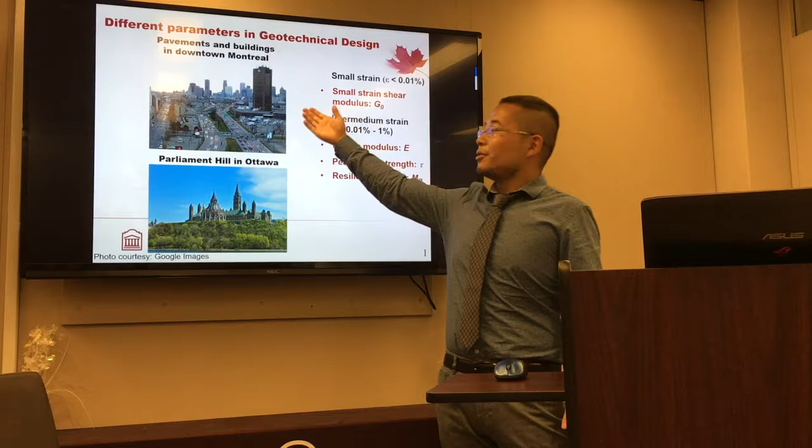For more regular geotechnical infrastructure, for example buildings, pavements in Montreal, or slope analysis here on Parliament Hill in Ottawa, we need the stiffness and shear strength parameters within the intermediate strain, which involve the elastic modulus, the peak shear strengths for the building and slope, as well as the resilient modulus needed in pavement design.

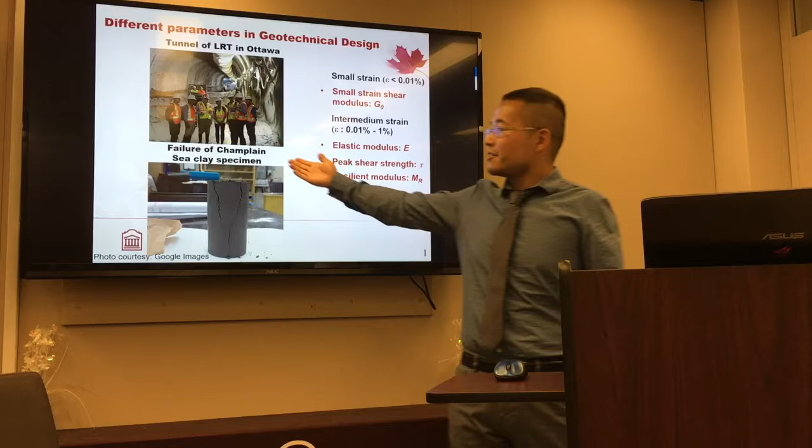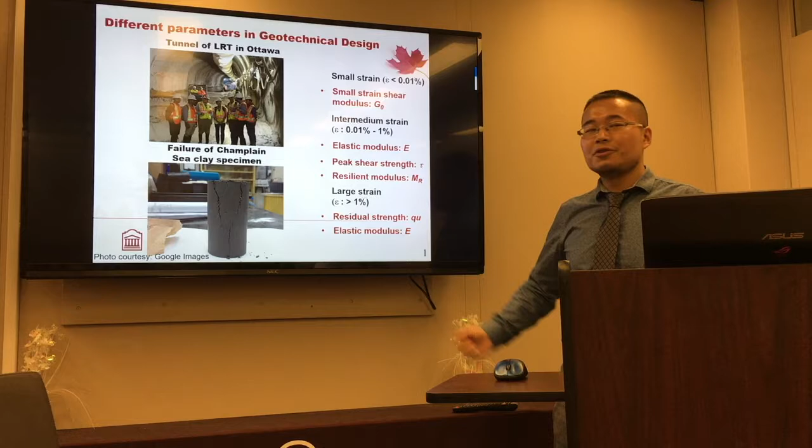In some cases where large strain is encountered, for example the tunneling project of the LRT here in Ottawa, or some laboratory tests where we have a Champlain Sea clay specimen being sheared to failure, we need the residual shear strengths or elastic modulus at very large strain levels.

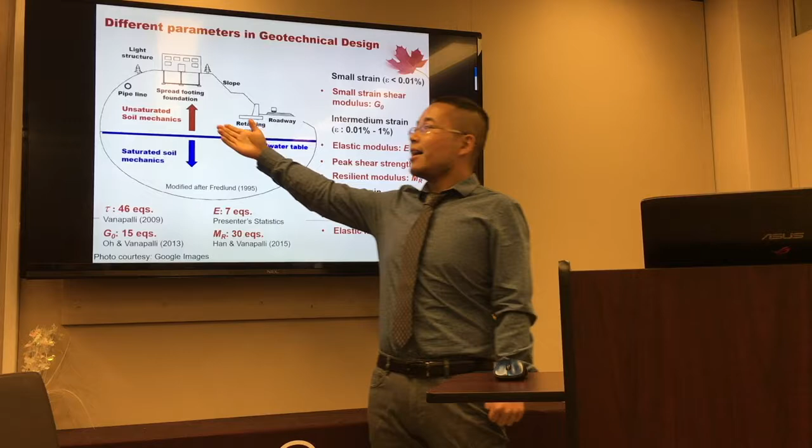On the other hand, our geotechnical infrastructure usually stays above the groundwater table, where soil stays in an unsaturated condition. So we should apply unsaturated soil mechanics instead of traditional saturated soil mechanics.

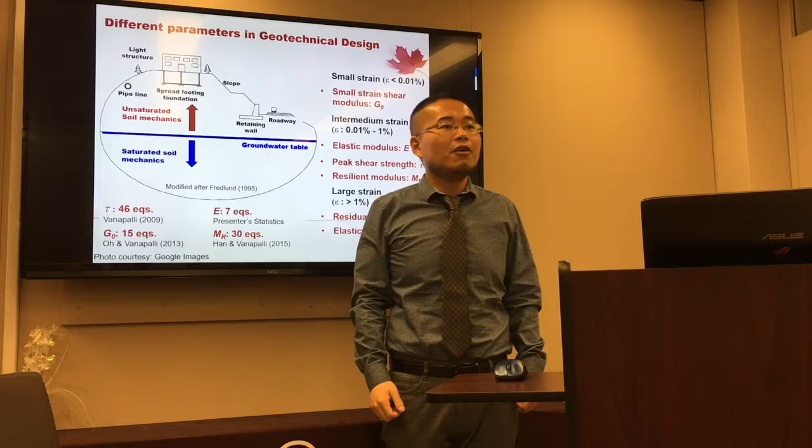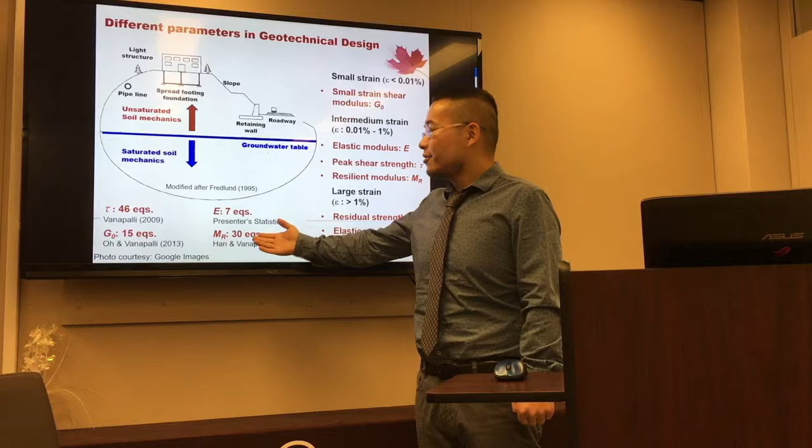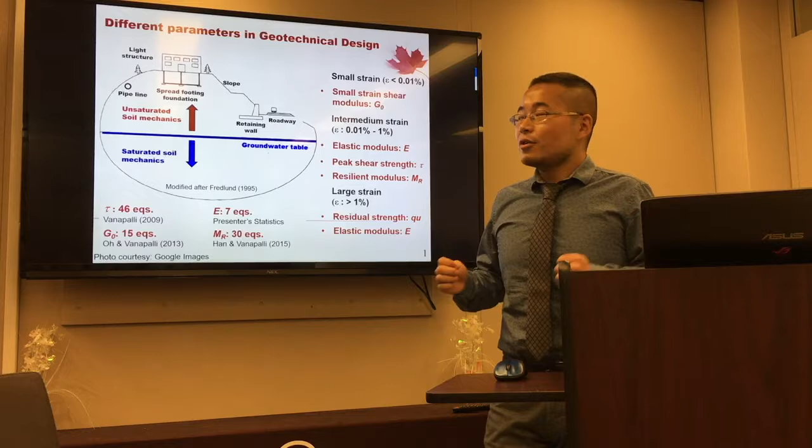Predicting the shear strengths and stiffness properties for unsaturated soils has never been an easy job, and there are many different ways. For example, in the literature currently there are at least 46 different equations available for shear strengths, 7 for elastic modulus, 15 at least for small strain shear modulus, and as per my statistics, 30 equations for the resilient modulus. So here is the question: will there be a uniform model that we can use to predict the variation of unsaturated soil properties with suction or with moisture content?

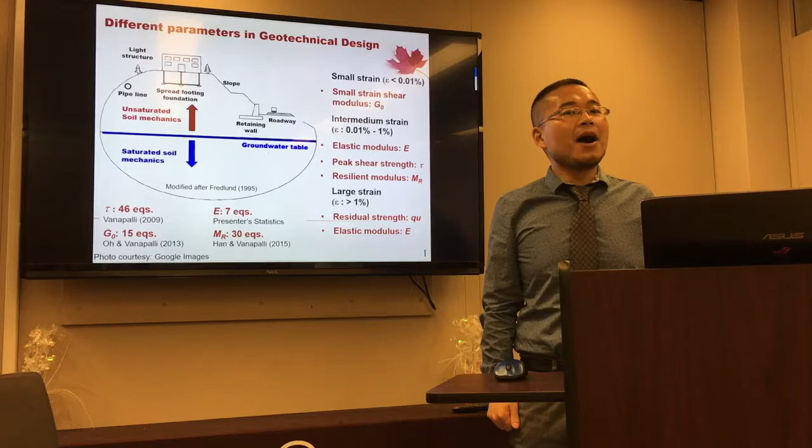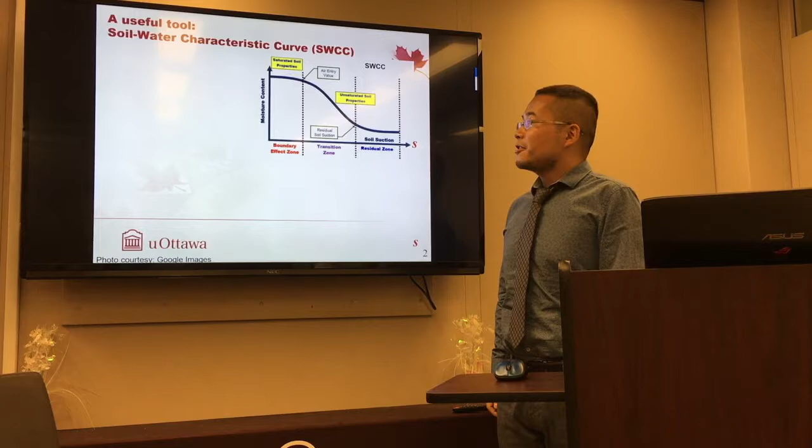And the answer is yes, we do. But before that, we need a very powerful tool, called the Soil Water Characteristic Curve, or SWCC. The SWCC describes the relationship between the moisture content within the soil and the suction.

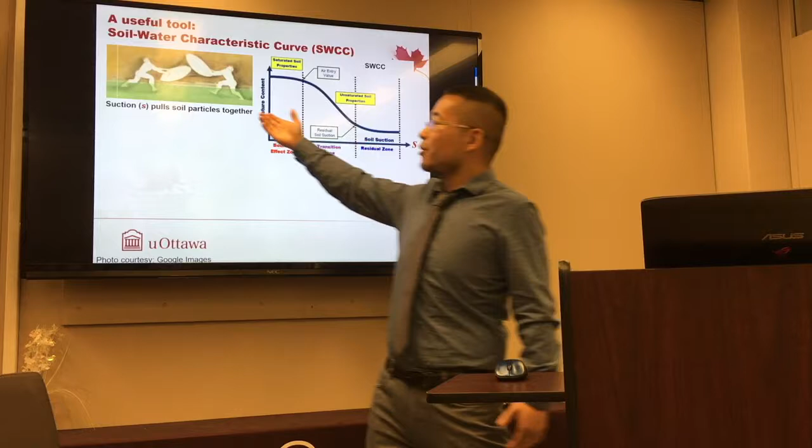The suction is a free energy within the soil which pulls the soil particles together such that it increases the stiffness and shear strength of the soil. For example, with an increase in suction there will be an increase, first linearly and then nonlinearly, in the stiffness and shear strength of the unsaturated soil.

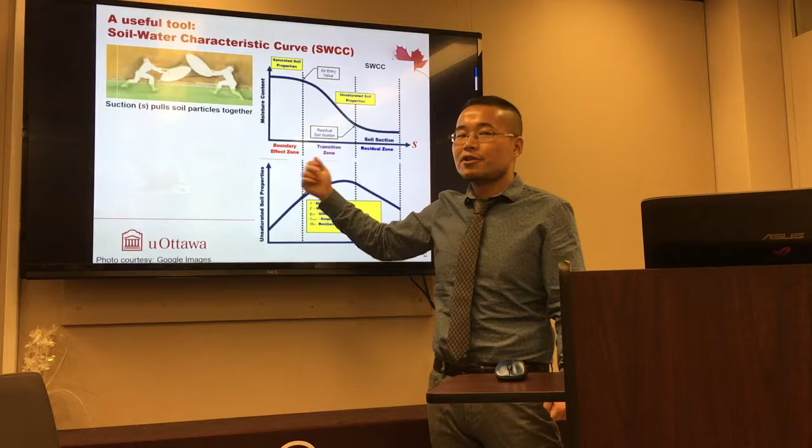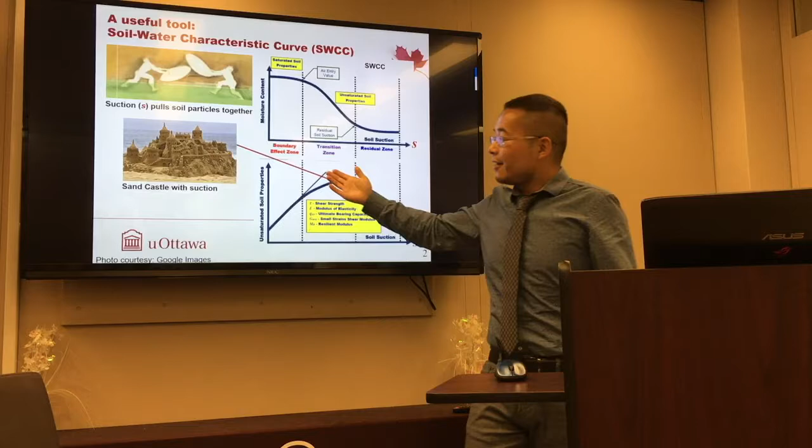Let's take the sandcastle example in this case. When the sandcastle comes with suction, the sand will have a higher stiffness and shear strength, and in this case the sand is very easy to handle, and we can build a beautiful sandcastle like this.

But if water comes and the sand becomes saturated, the sandcastle loses its suction. In this case we'll have a much lower stiffness and shear strength, and then the sandcastle will start to collapse.

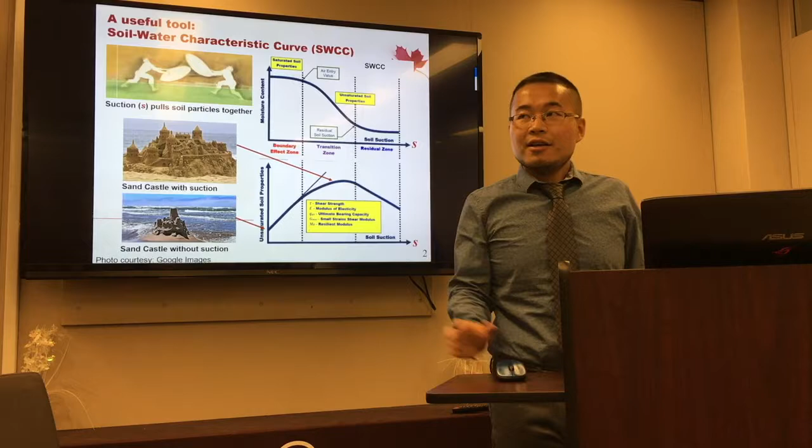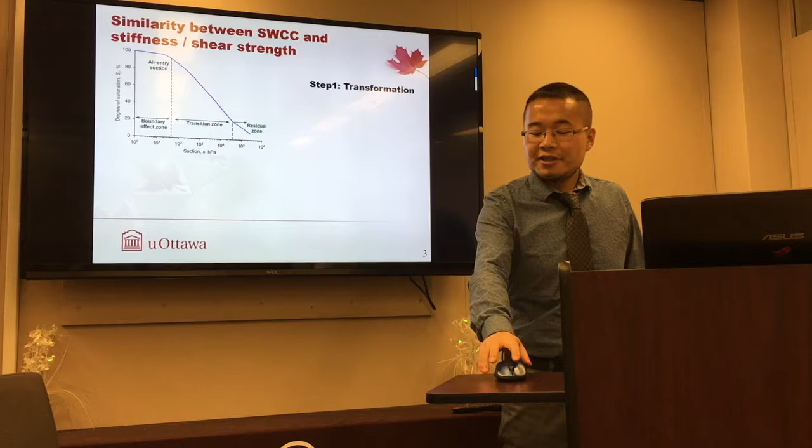So the SWCC can be used as a very powerful tool, but how can we use it? We need two steps. The first step is transformation. For example, we have an SWCC which describes the relationship between the degree of saturation and the soil suction. But if we want to transform this relationship into another form, we need a transformer.

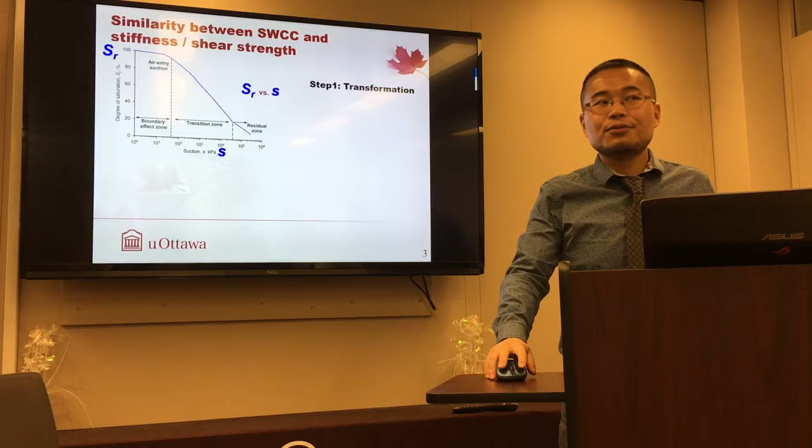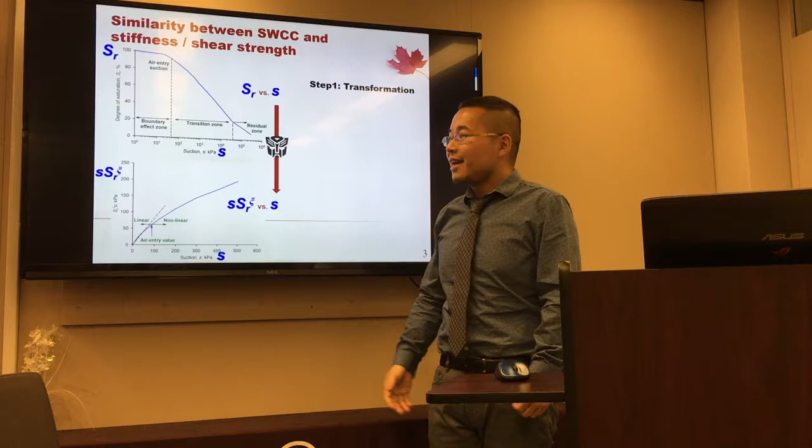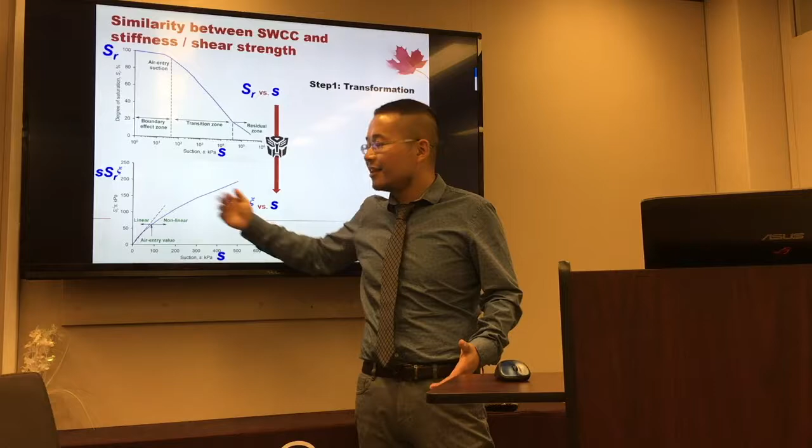After transformation, the SWCC becomes like this: suction multiplied by the exponential of the degree of saturation versus suction relationship, and the exponent is called xi. In this case, the SWCC transforms to a shape like this, which is linear at the very beginning and becomes nonlinear with increasing soil suction level.

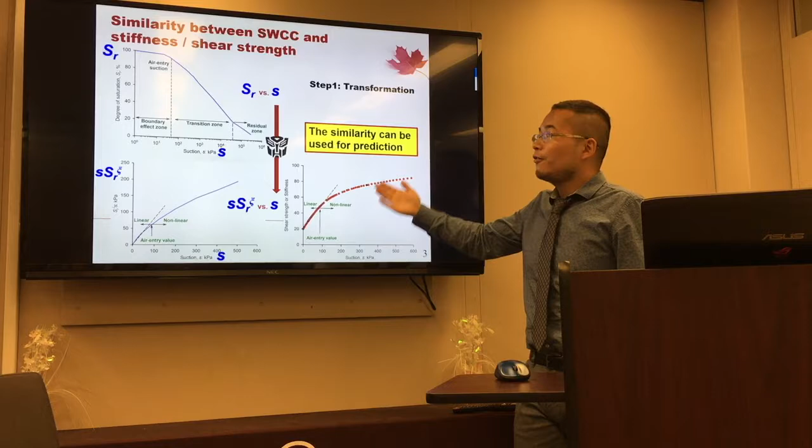Let's recall the variation of soil properties with suction. It is also a linear and nonlinear characteristic curve. So in this case, there is a possibility that we use the similarity between this curve and this curve for prediction. But how can we use such similarity?

We need the second step, which I call normalization. Let's bring those two curves back.

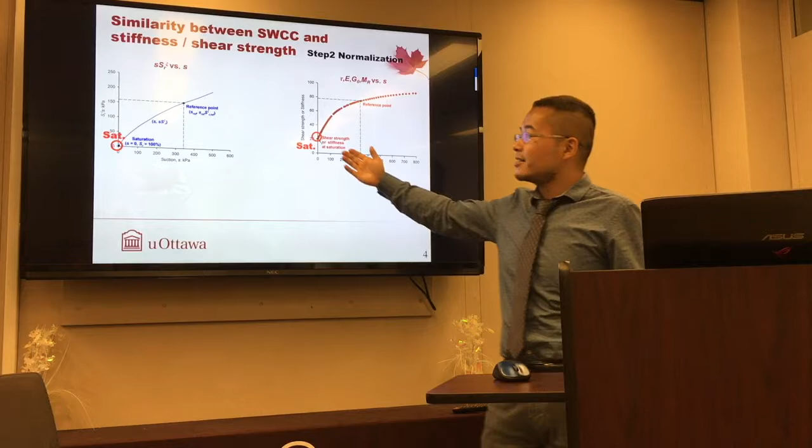Linear to nonlinear. If we can choose 2 points, with one point being the saturated value and the other point being a reference value, we use the following formula: subtract the value from the values on those two curves by the saturated value, and then divide by the difference between the reference value and saturated value.

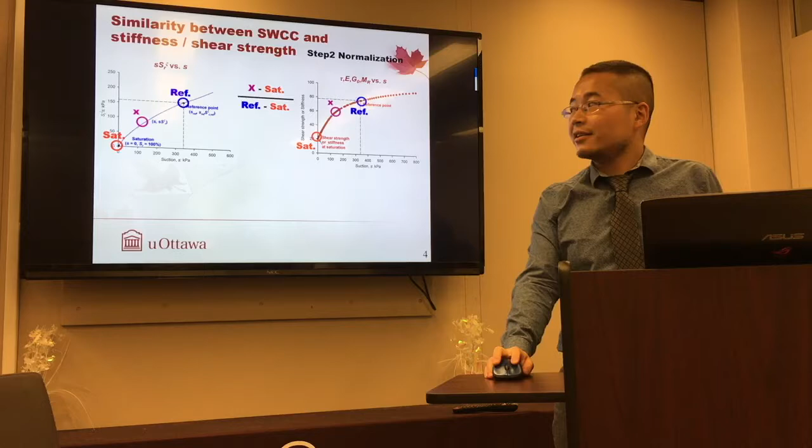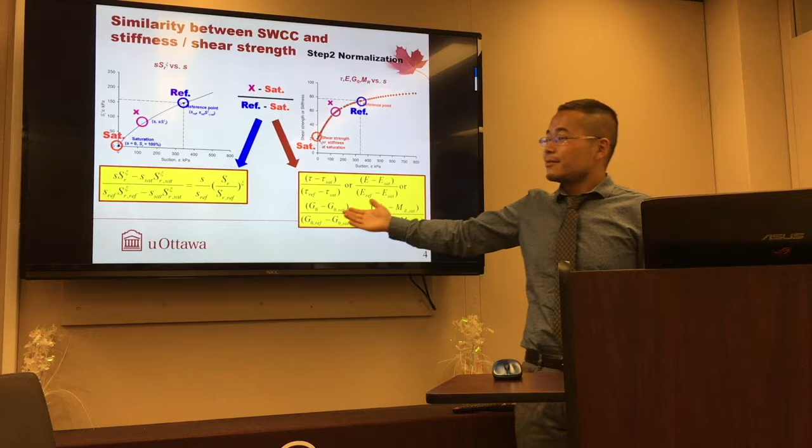Such a formula for the SWCC will give us an equation like this. And then for stiffness and shear strength, it will give us an equation like this, for example shear strength, elastic modulus, small strain shear modulus, and resilient modulus.

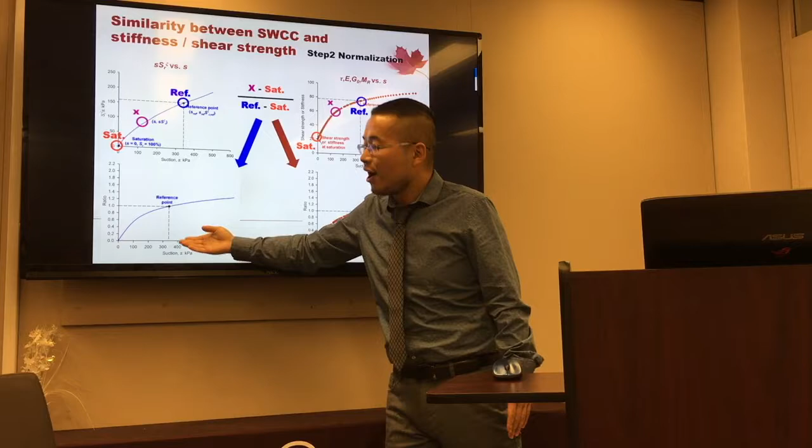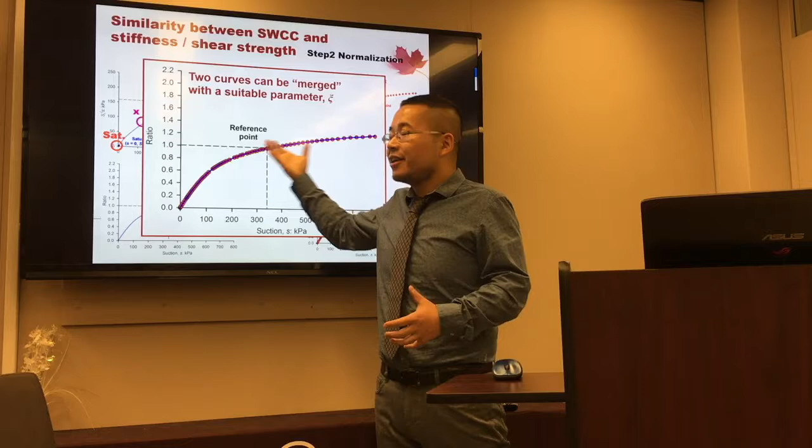After the normalization, those two curves are normalized to the same scale, typically between 0 and 1. And if we can find a suitable fitting parameter, xi, those two curves can be merged together, becoming one. In this case, if this is possible, we will obtain an equation like this.

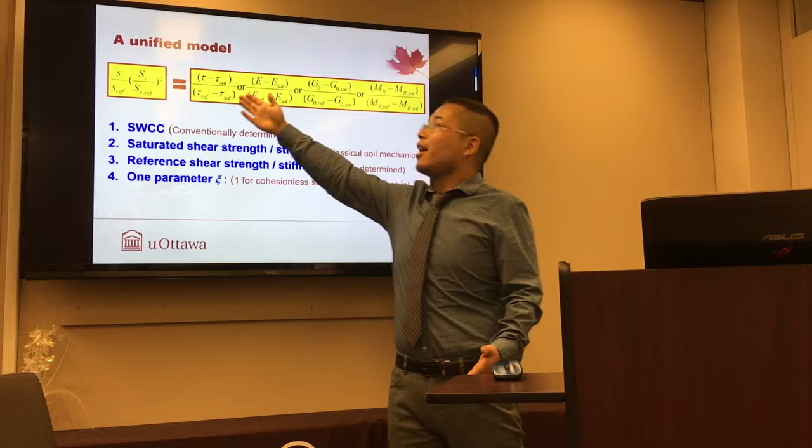And then we can predict the variation of the stiffness, either tau, E, G0, or MR, with respect to either soil suction or degree of saturation or other moisture contents.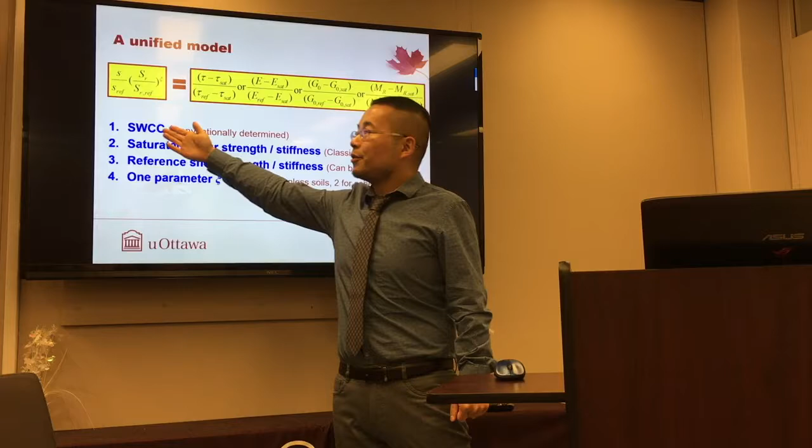In order to use this equation, we need 4 pieces of information. The first is the SWCC, which can be conveniently measured in our lab. The second is the saturated shear strength and stiffness, which can be derived from conventional soil mechanics. The third is the reference shear strength and stiffness at just one point, which we can measure. And the fourth is the one parameter, xi.

We found that it's very encouraging that a xi value of 1 works well for cohesionless soils, and a xi value of 2 works pretty well with cohesive soils.

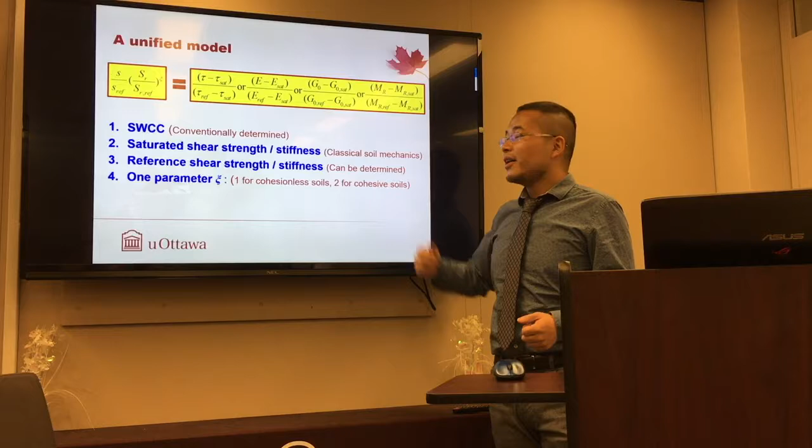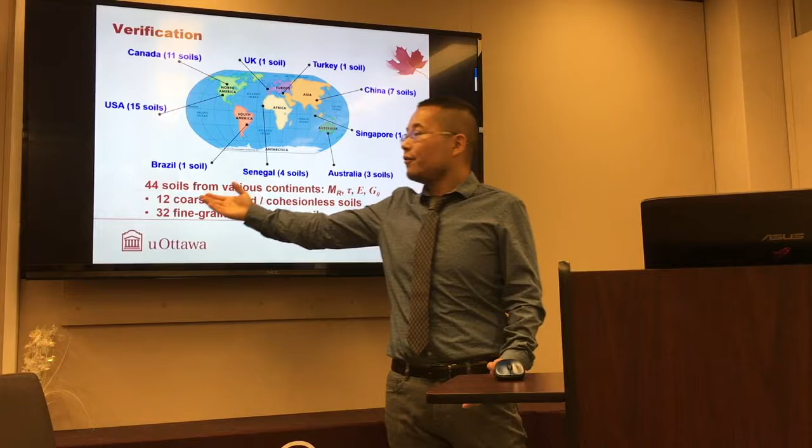In order to validate this equation, we chose 44 different soils from various continents in our world, and those data include testing data on resilient modulus, shear strength, elastic modulus, and small strain shear modulus. The data covers 12 different coarse-grained or cohesionless soils, as well as 32 fine-grained or cohesive soils.

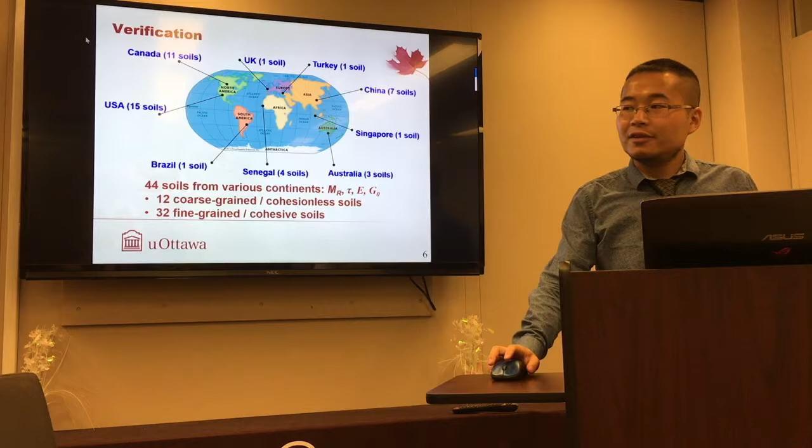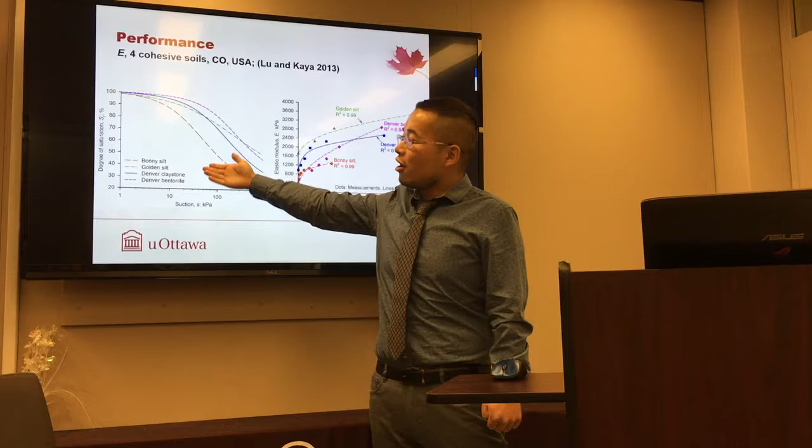I'm just showing several examples of the prediction. The first example is on the elastic modulus of 4 different cohesive soils from Colorado, USA. Those are the SWCCs of those 4 different soils, and this is the prediction.

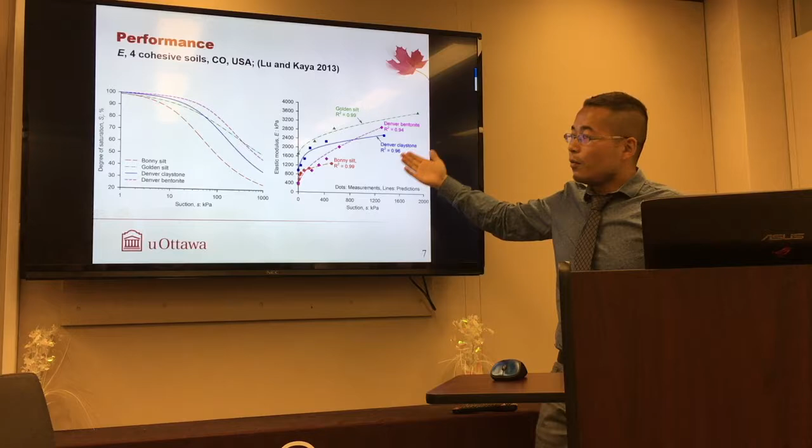As you can see, the dots with different colors represent the measurement, while the line with the same color represents the prediction. A very good prediction has been achieved for 4 of those soils.

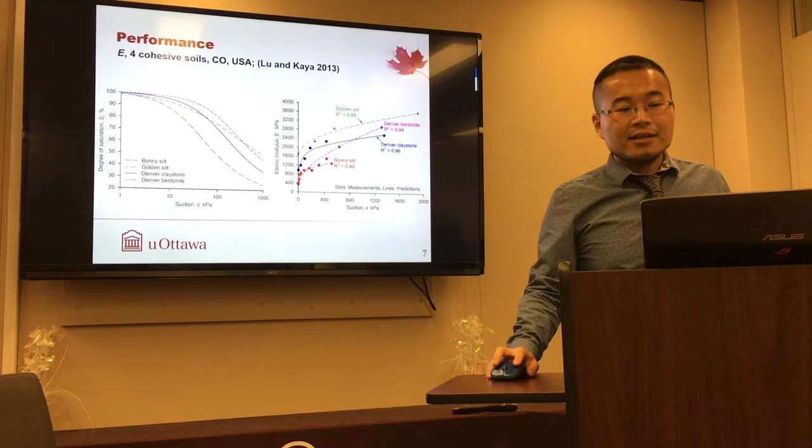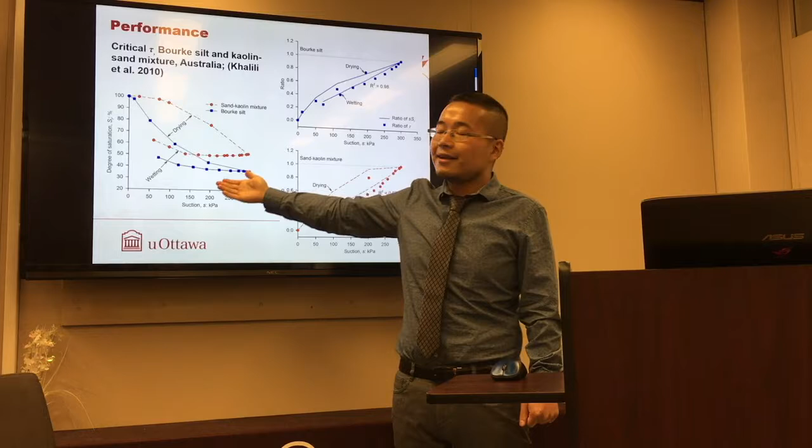The second example is on the critical shear strength of two soils from Australia. The hysteresis characteristics curves of the SWCC are highlighted here. And this is the SWCC for the two soils.

This is the prediction for the first soil, Bourke silt, as you can see. And then the second one is for the sand-kaolin mixture. Also, the prediction is favorable.

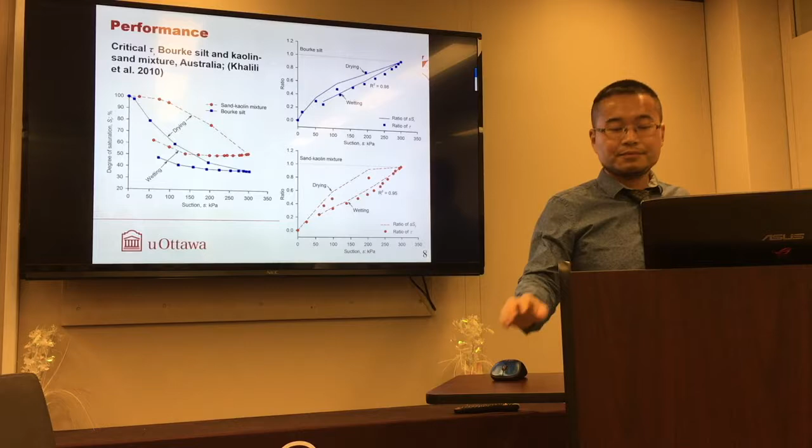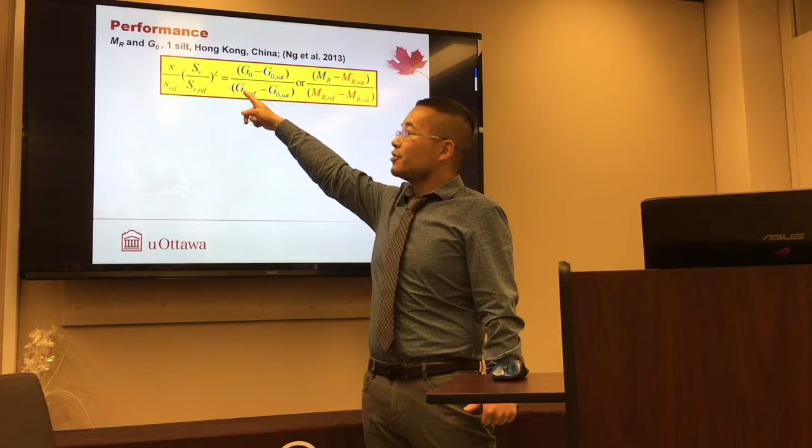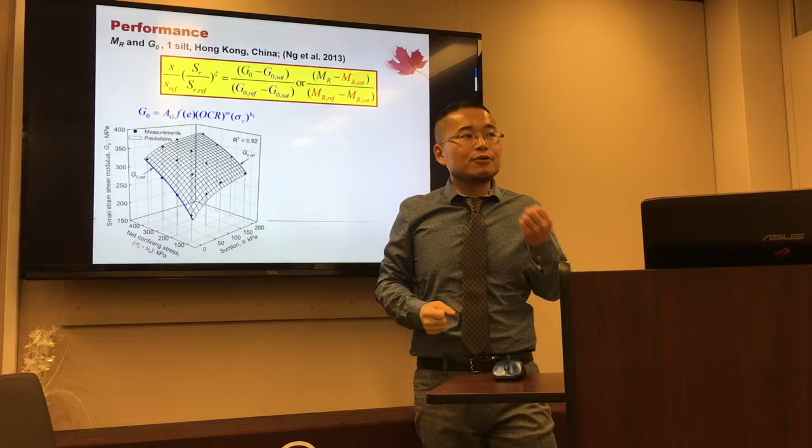In addition, coming back to our equation, if we can express the saturated value, such as G0 sat or MR sat, as well as the reference values, such as G0 ref or MR ref, using a stress-dependent model - for example, for the small strain shear modulus we can use this stress-dependent model - in this case we can introduce the influence of the stress state into the prediction, and then predict a very smooth surface in the G0, stress, and suction space.

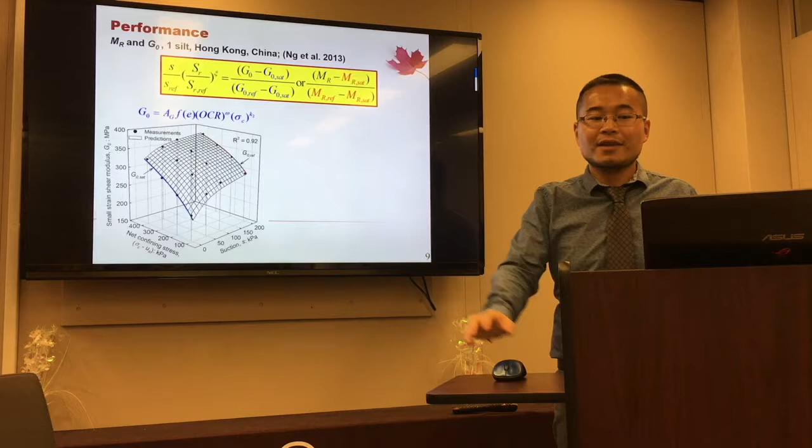And this is a very smooth curve that also describes well the variation of G0 with both stress state as well as suction. And here is another case for the resilient modulus, if the resilient modulus is expressed using another stress-dependent model.

And then again, another smooth surface can be created that predicts well the behavior of the resilient modulus.

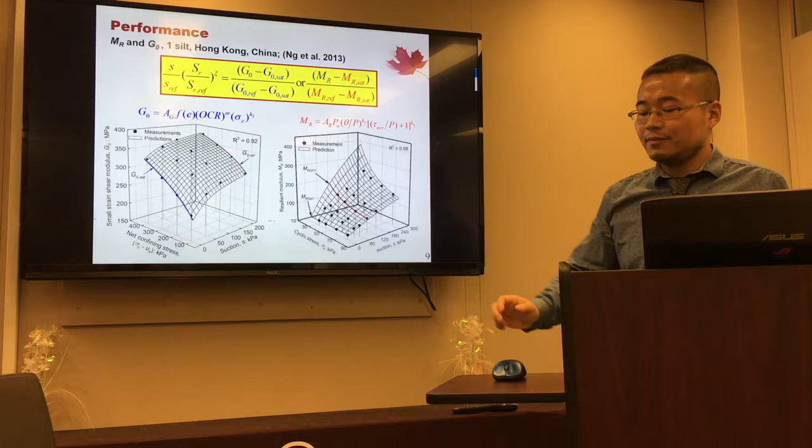In addition, we also applied this model in Ontario. Recently, there has been a cooperation between the Ministry of Transportation of Ontario and the University of Ottawa working on a project to facilitate the implementation of the mechanistic empirical pavement design guide in Ontario.

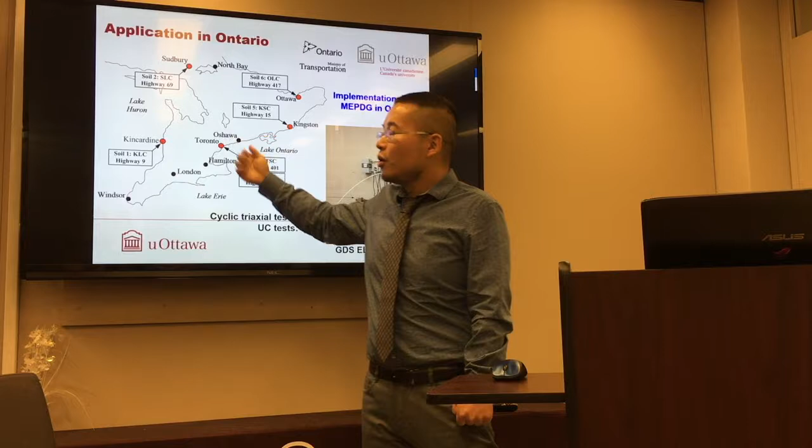Here, we selected six different soils from different locations in southern Ontario. We used the GDS ELDYN testing system to test those 6 different soils.

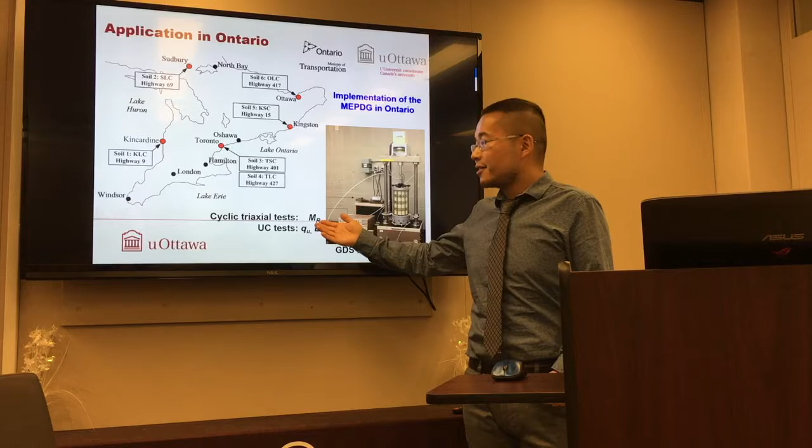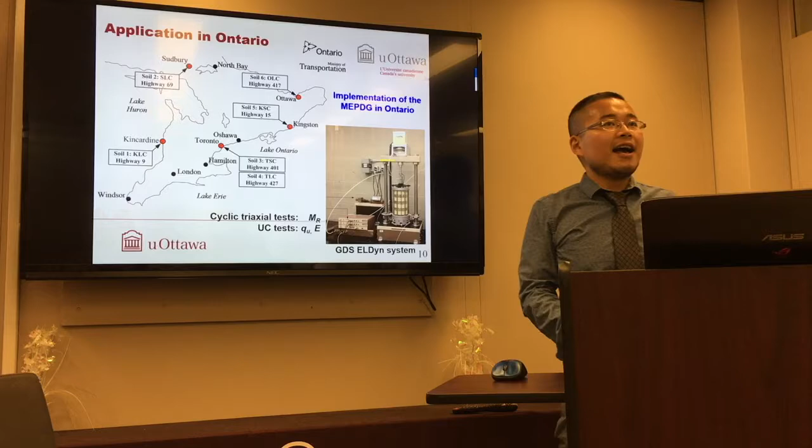We obtained the resilient modulus as well as the shear strength and elastic modulus for all 6 different soils, as well as their variation with soil suction and moisture content. This model has already been applied to all the testing data with favorable prediction results.

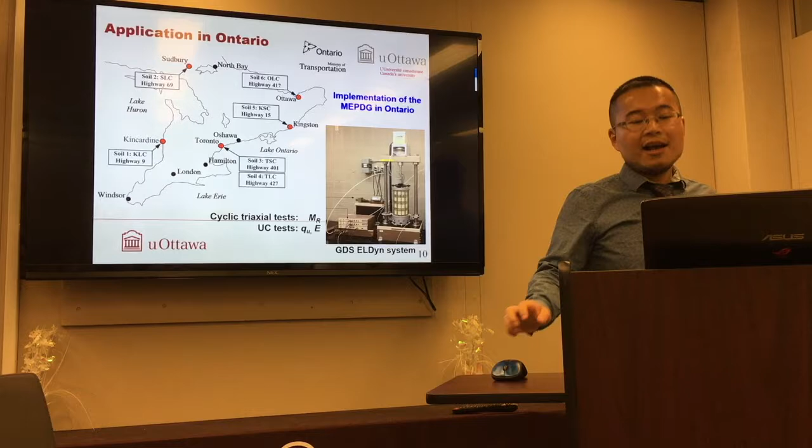I'm going to show 3 examples. This is the prediction result for a silty clay collected from Toronto. As you can see, this is elastic modulus, shear strength, and resilient modulus.

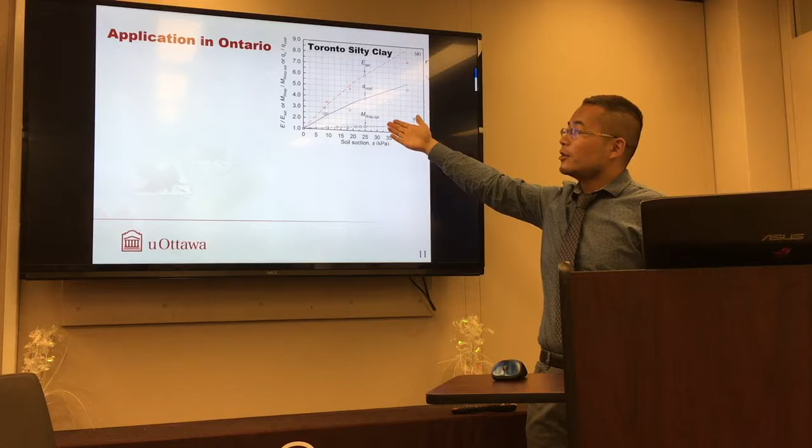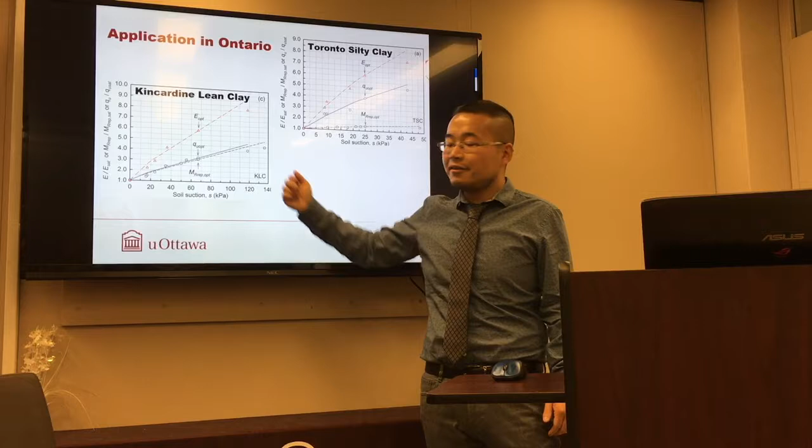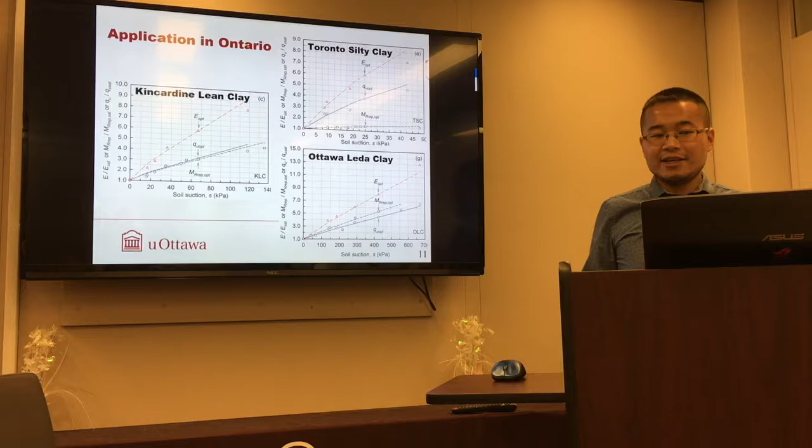All predictions are favorable. Here's another case for a lean clay from Kincardine, also in Ontario. Again, favorable predictions are achieved. The third one is a Leda clay from Ottawa, which is actually a marine clay that is sensitive in nature, and we can see good predictions are available for this soil as well.

Throughout this project, we determined the basic soil properties and the optimal moisture content, which are the basic information needed in pavement design. We also measured the California bearing ratio as well as the representative resilient modulus for all the soils as the design value.

We also investigated the variation of CBR and resilient modulus with suction and moisture content using our model.

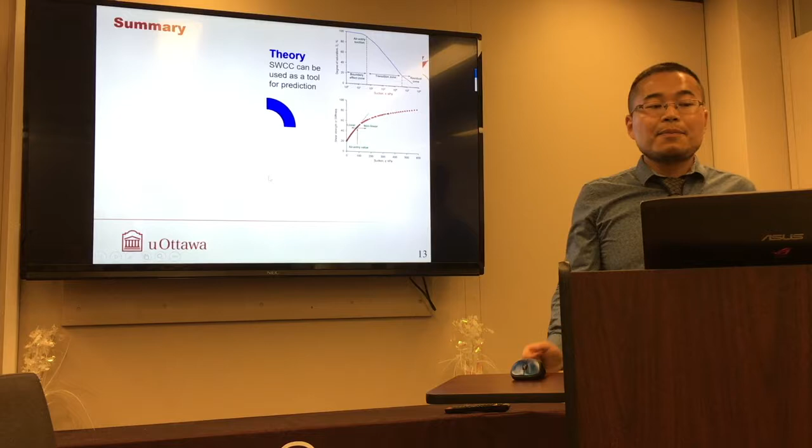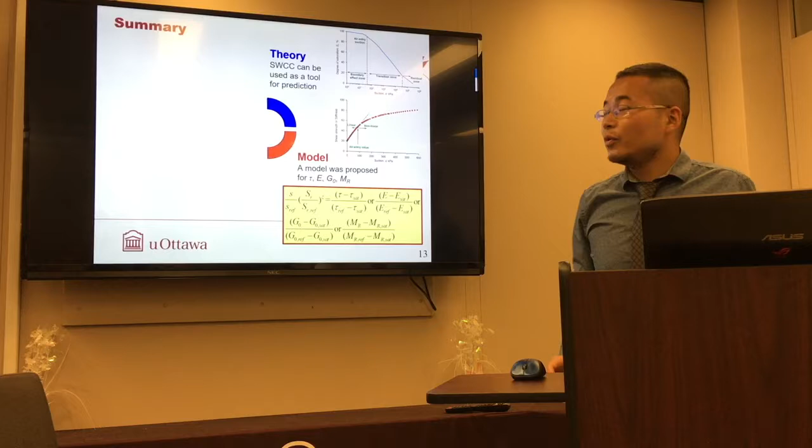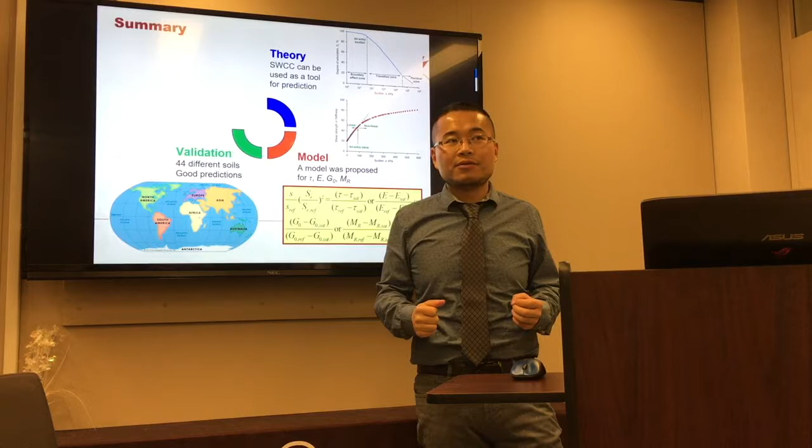So to sum up this presentation, we explored the possibility of extending the similarity between SWCC and shear strength or stiffness for prediction, and it worked. We came up with a model that takes this form. In order to validate the model, we used 44 different soils from all over the world, and good predictions have been achieved, in order to apply this model in Ontario to facilitate better pavement design.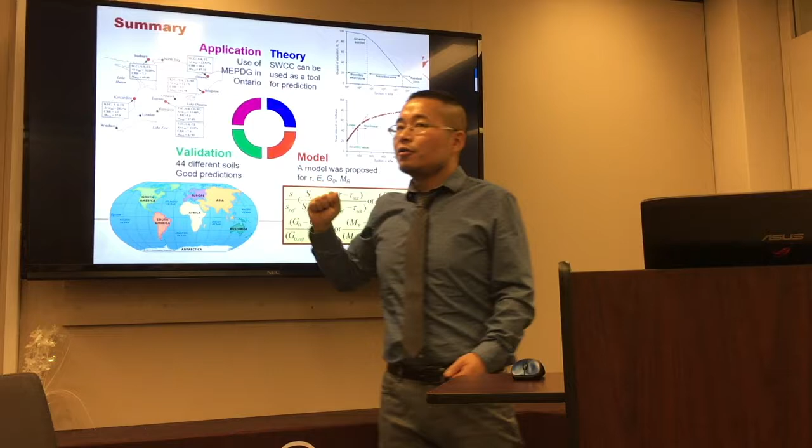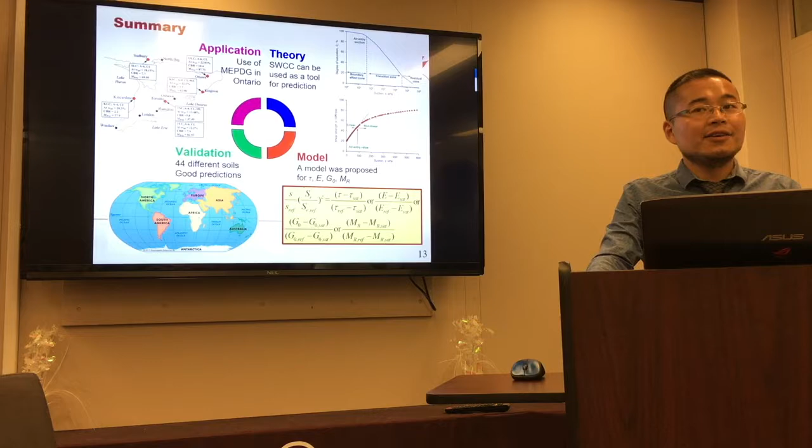Specifically, we use this model to predict the variation of resilient modulus with moisture content, such that pavement design in Ontario could take into account the influence of environmental changes. Those are the references related to this presentation, and I thank you for your patience.

I'm willing to take several questions. Thank you. Thank you, Han. Questions? Dr. Infante Sedano.

Yes, thank you for your presentation. You mentioned in the equations you presented that you always normalize and need a reference value other than the saturated property, correct? What is, or do you have a recommendation as to what reference value one should choose, or does it make a difference? Okay, thank you very much.

Actually, the reference value is key information needed to use this equation. Most of the time for engineered soil, we try to compact the soil at its optimal moisture content conditions such that we obtain the highest shear strength or stiffness and the highest density. In this case, the stiffness and shear strength at optimal moisture content could be suitably used as the reference point. This is also the case when we predict resilient modulus for the different Ontario subgrade soils, because for subgrade soils particularly, we compact the soils exactly at optimal moisture content as per the specification of pavement design guides.

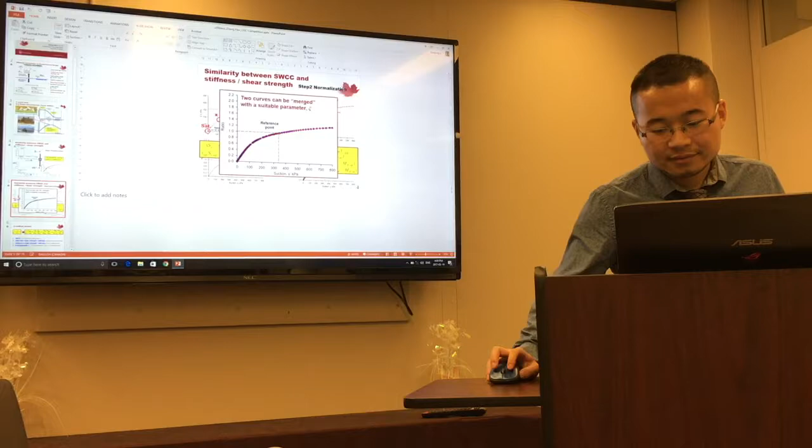Questions from students? Matthew? Yes, Jason. Yeah, thank you, Dr. Han. I will continue with Dr. Infante's question about the reference point. Can we go back to page 4? Okay, go back to page 4. Yeah, yes, a little more.

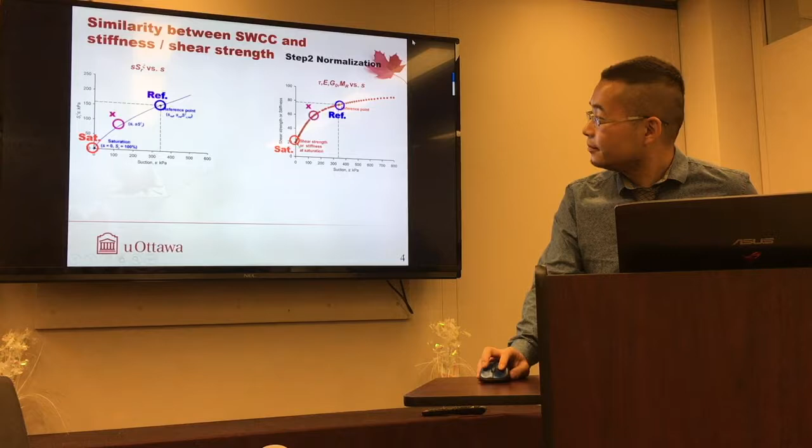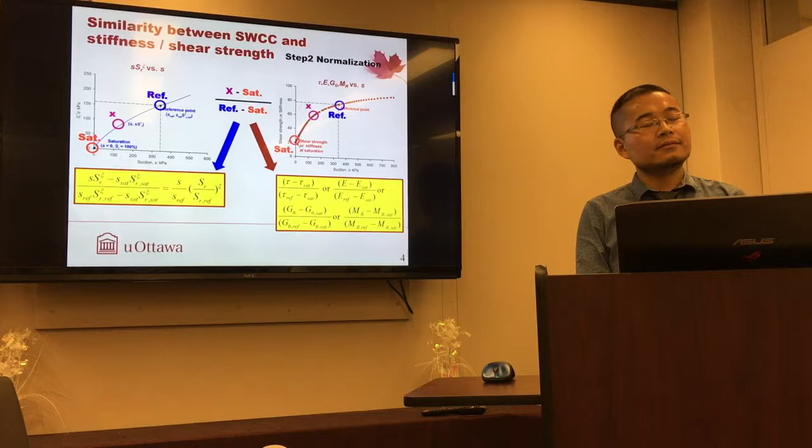Yeah, it's okay. I have a question about the denominator as reference point minus the saturated point, right? Do you think the choice of the reference point will have a large influence on the prediction results? Because if you choose the reference point larger, then you will cover more points between the saturated point and the reference point. So that is my question.

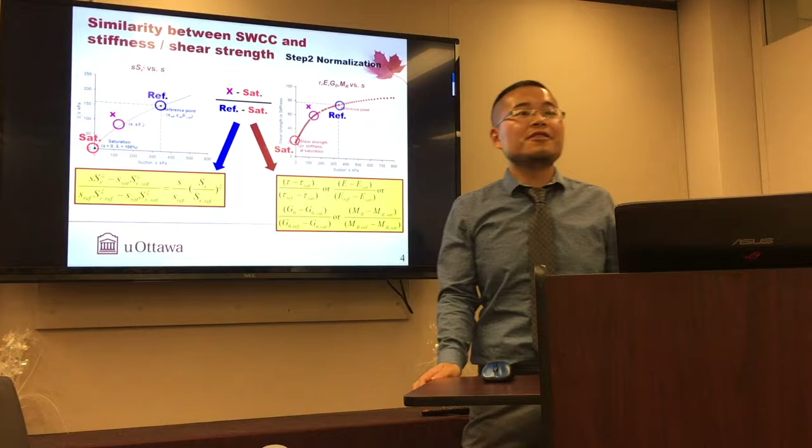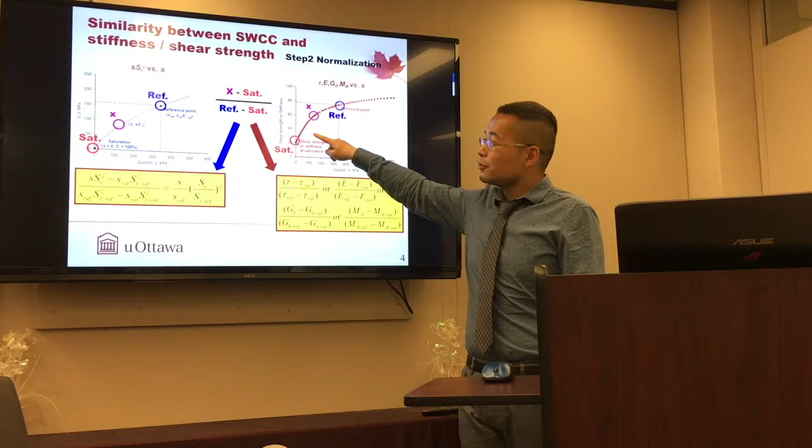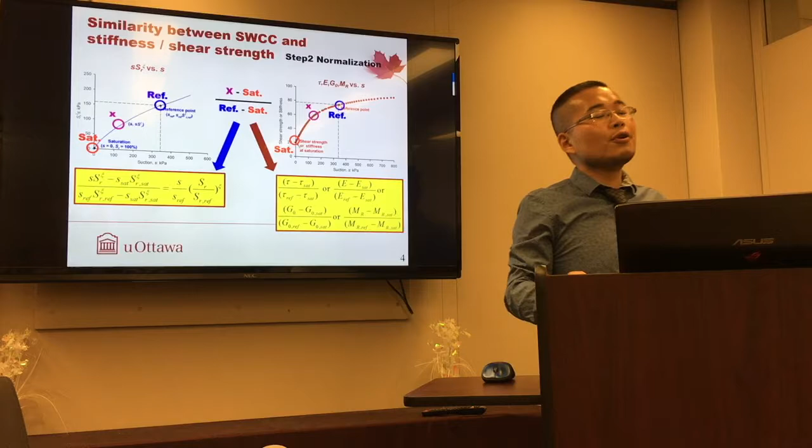Okay, actually I agree with you for sure. The choice of the reference point will definitely influence the results of the prediction, because the actually measured data will not be strictly distributed along a smooth curve; there will be some scatter. So if you choose one point, you get one curve, and if you choose another point, you get another curve. But as shown in one of our recent publications regarding this model, when your measurements are reliable, the differences introduced by choosing different reference points are not significant and can sometimes be neglected. So there will definitely be influence, but if data are reliable, the differences between different predictions introduced by different reference values will be negligible.